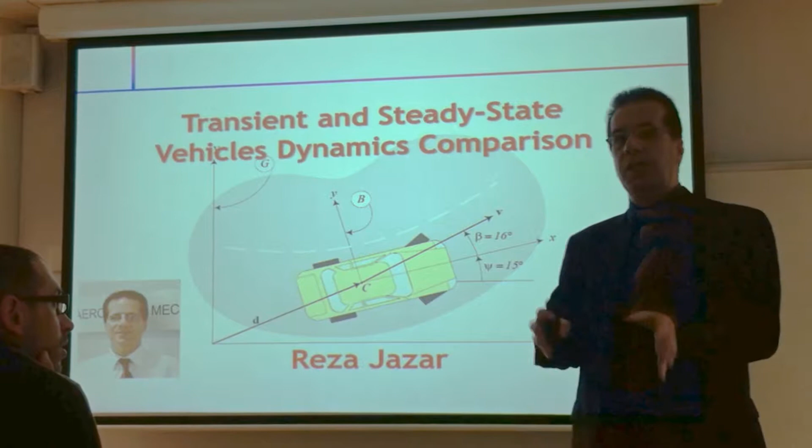A few years ago, in 2009-2010, I introduced a new algorithm called the auto driver algorithm for autonomous vehicles, especially for vehicles on the road. When you are on a road, you are following a line, so one-dimensional motion. When you are on a field, it's two-dimensional, more freedom. So the categories are different.

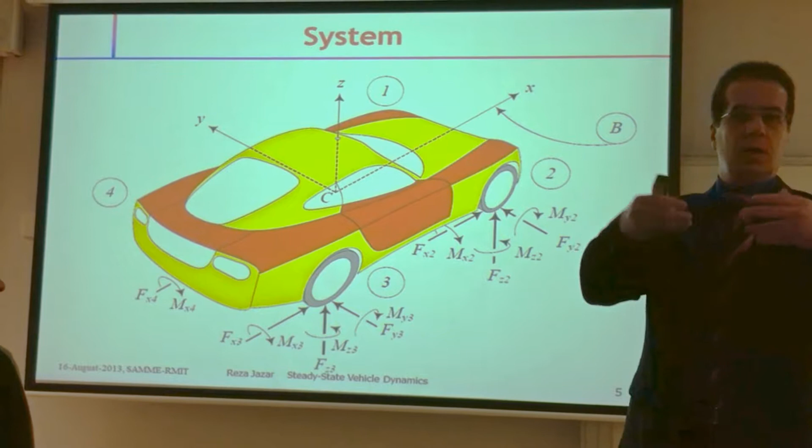I worked on that, and I'm going to develop something because of the difficulty to solve differential equations online fast enough. Today, I'm going to show you and investigate how close the response of the vehicle according to the steady state equation is to the transient equation. And if it is close enough, in the future we are going to use them, and I'm going to talk about that. For those people who are not in this area...

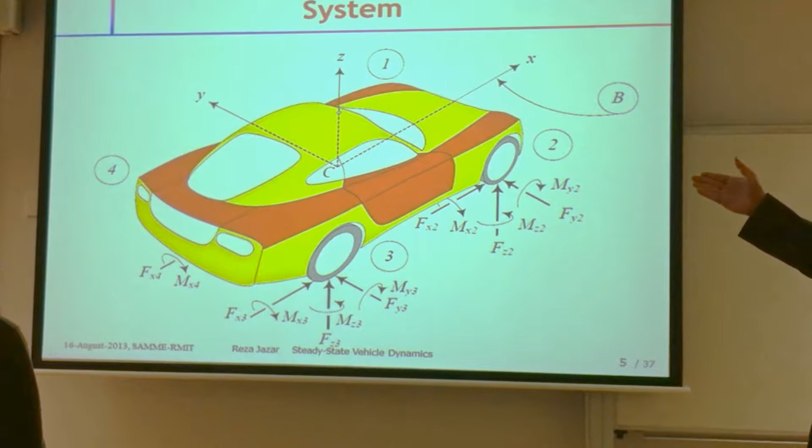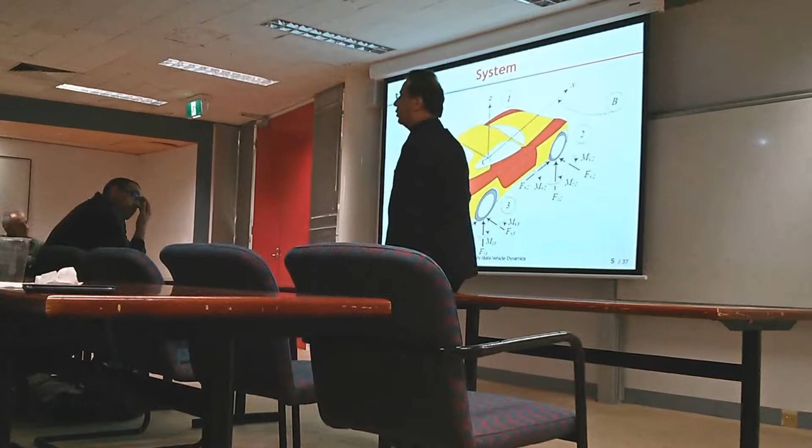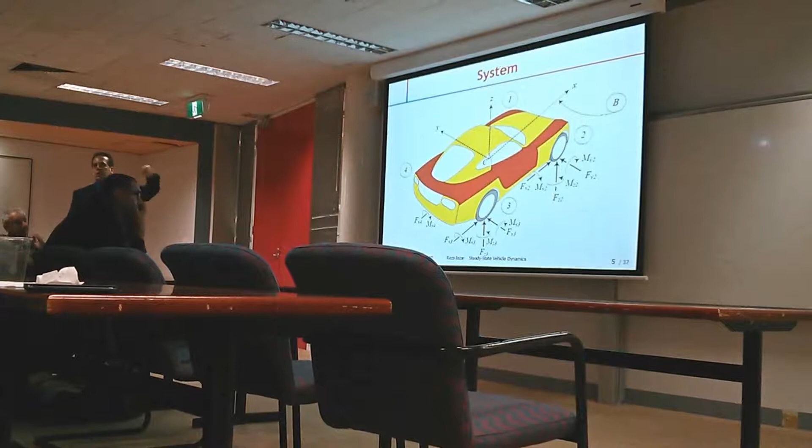We move all forces to the mass center of the car. The car is a rigid body, and those equations make the equations of motion. We make another assumption and assume that the car is planar.

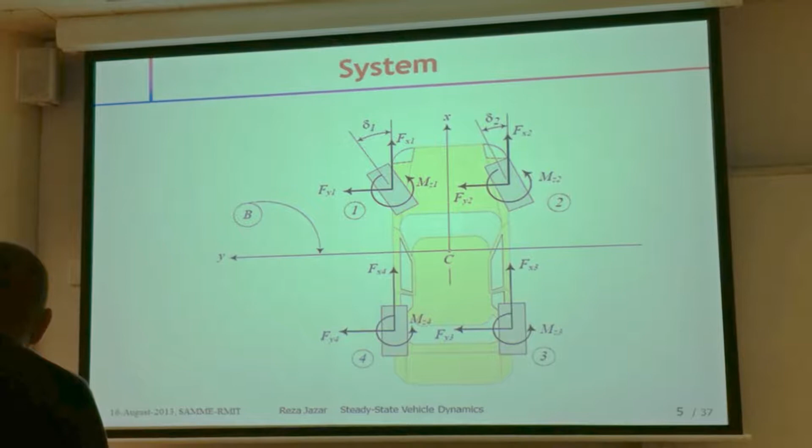Planar means no bounce, no Z movement, no rotation about X, which we call roll, no rotation about Y, which we call pitch. So we have 3 degrees of freedom out of 6. We have X direction motion, Y direction which is lateral motion, and then yaw rate or yaw motion, rotation about Z. So 3 degrees of freedom.

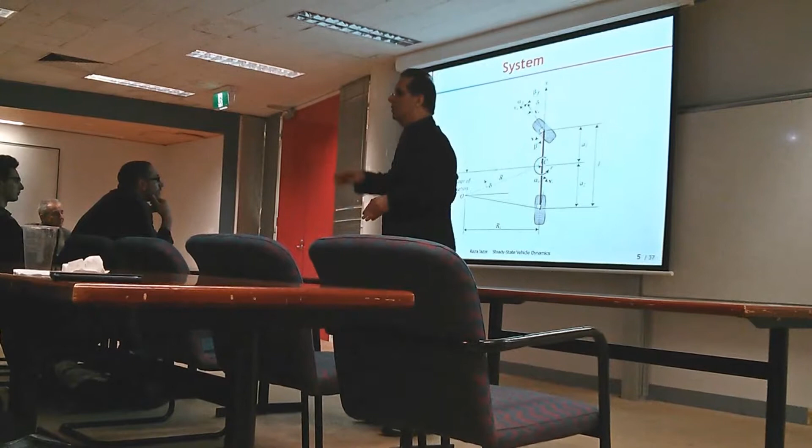Besides that, we make another simplification. We make it a bicycle model. When we have no roll, we don't need 4 wheels on the side. We can make it a bicycle, 99% exact. So whatever we do is the bicycle model.

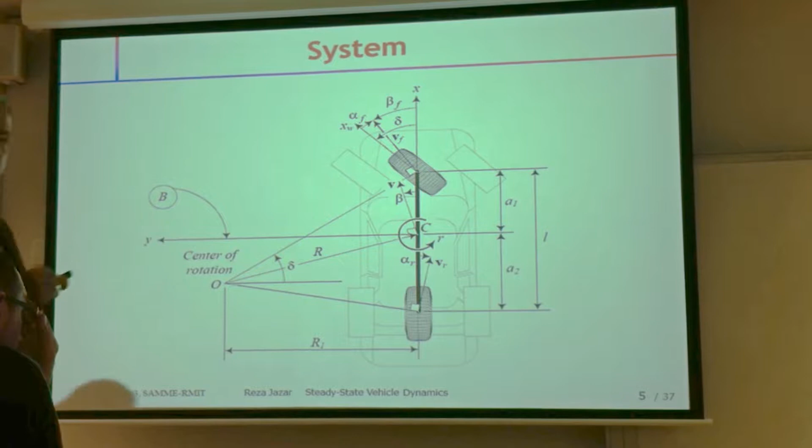I'll show you the equations, but before going further, I have to mention a few things. First, A1, A2 show the position of the mass center, critical information. A1 and A2, the position of mass center, makes your car understeer or oversteer. It is stable or unstable. Our cars, all of them, are understeer, stable.

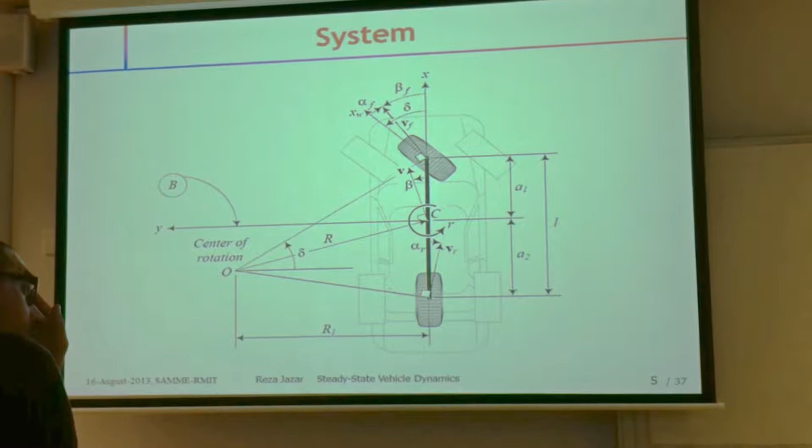So that's one thing. The other thing is delta. Delta is a steer angle. It is in your hand. We dictate what is the delta for this system. So delta is input from the driver. We dictate delta.

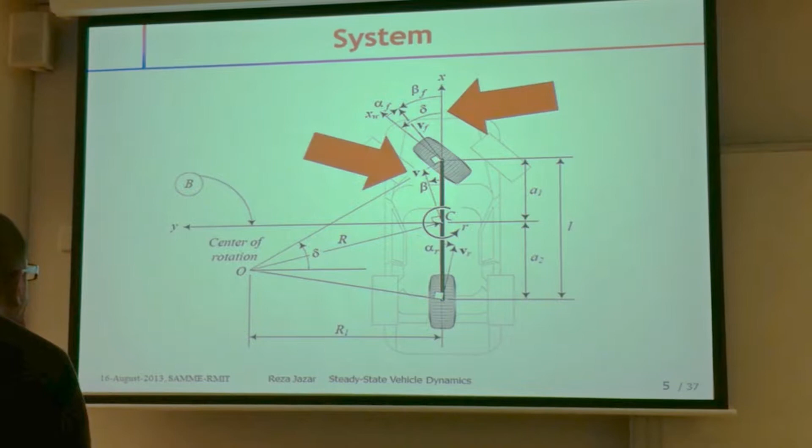V is the velocity of the car at the mass center. V has 2 components, Vx, which is in my control, so you control Vx, and Vy, which is lateral velocity associated to beta. Beta generates the angle of velocity. So V has Vx as input in my hand, and Vy as output of this system.

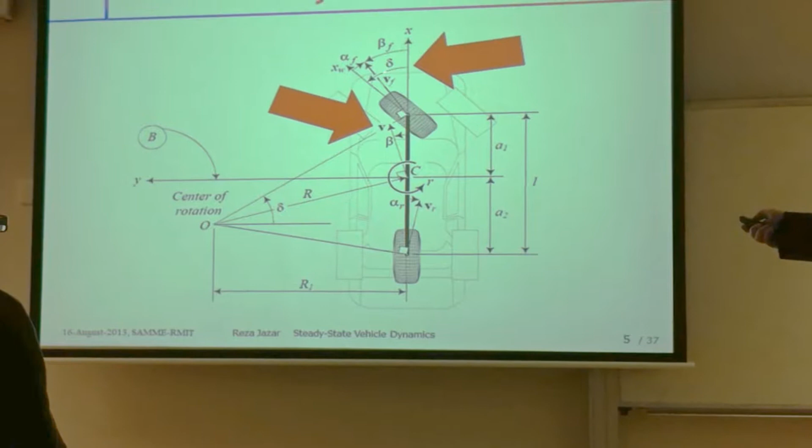This comes from a steering angle. So beta is another output. Also yaw rate, R is the yaw rate, so angular velocity is the dimension. That's all. This is the equation of motion.

Degree of freedom: usually we must have Fx, which is traction force, and calculate velocity, but practically we determine Vx and we calculate the required force. Forget about that equation. These 2 equations clearly give you the information we need: lateral velocity and yaw rate. These are 2 degrees of freedom, which are output of the system. The first equation is independent of the other one.

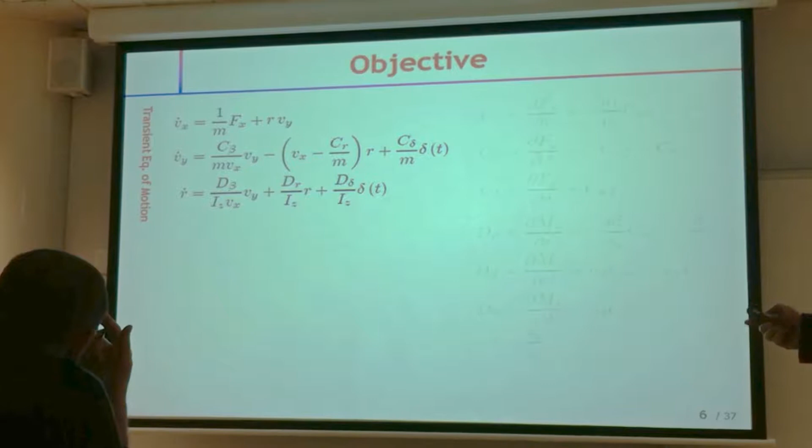These parameters or coefficients are here. Look at these coefficients, which are going here. Take a look: A1, A2, C alpha front, C alpha rear, and the rest of them are the same. It means when you have a car, you have the mass center position, so A1, A2 are fixed.

C alpha F is the side slip coefficient of the front tire, so it is a property of the tire and pavement interaction. This is for front, this is for rear, because it's a function of normal weight, so usually these 2 are different even though you are using the same type of tire. So when the car is given and the pavement is given, these coefficients are given.

There is one parameter Vx, which must be given by the driver. So you put them here, and the differential equations are set.

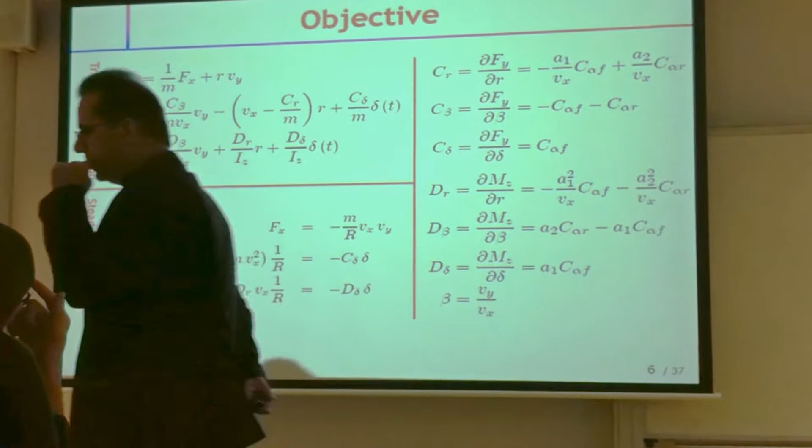Steady state condition means nothing is changing with time. So everything, every derivative, everything with a prime, with a dot, would be 0. Put these three to 0, simplify these equations, and these are the steady state equations.

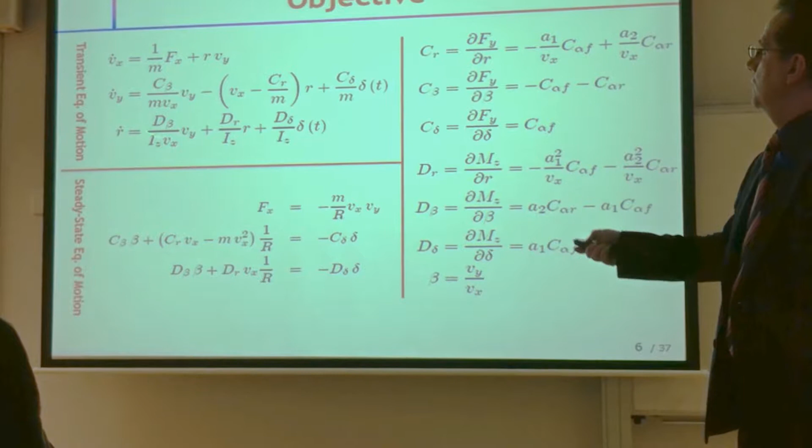So my job today, or objective, is to show if the solution from here can be trusted enough to be substituted for the solution here. What is the purpose of that? I will tell you later. So this is the objective: how close is the vehicle's steady state behavior to the transient behavior?

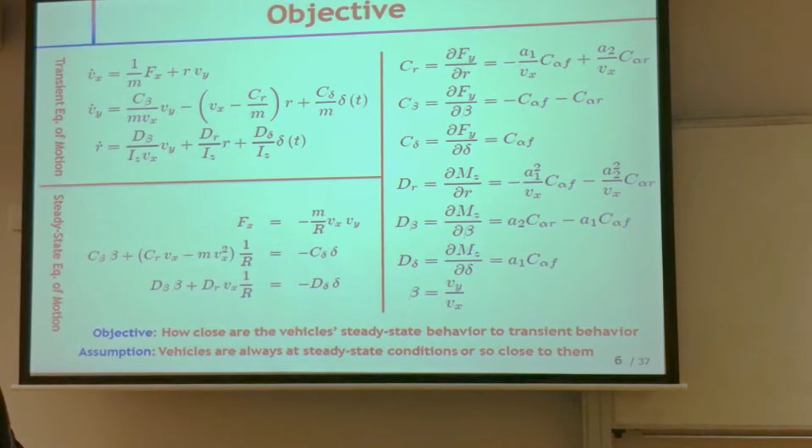And what is my assumption? The assumption is that vehicles are always at a steady state condition, or so close to a steady state condition. This is true. When we drive, our car is always close to a steady state condition. We don't have that many transitions.

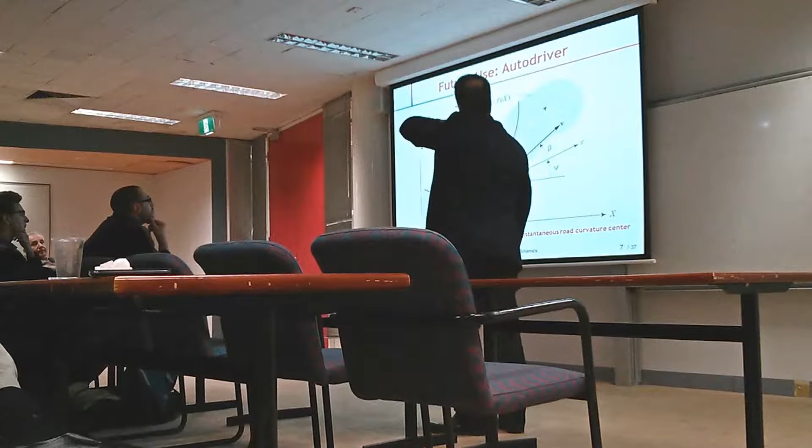The purpose of that is to use it in an auto-driver algorithm. This is another assumption: cars or vehicles are always turning about the center of curvature of a road. So when you have a road, it's a mathematical line. At any point, there's a curvature center. If you are going to follow the road, you must turn about that point at that time. So this is the assumption.

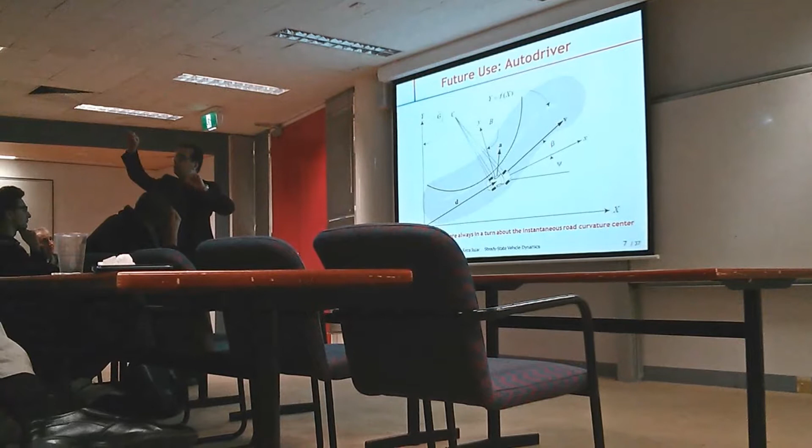How can we design a system to do this job for the driver? So the driver is not steering the car, steering would be done by a computer. It's so easy, the idea is so easy. It's a line, at any point the curvature center is given. We have to adjust - the computer has to adjust the steering angle to find the center of rotation of the car, and put it at the center of rotation of the road. It looks simple.

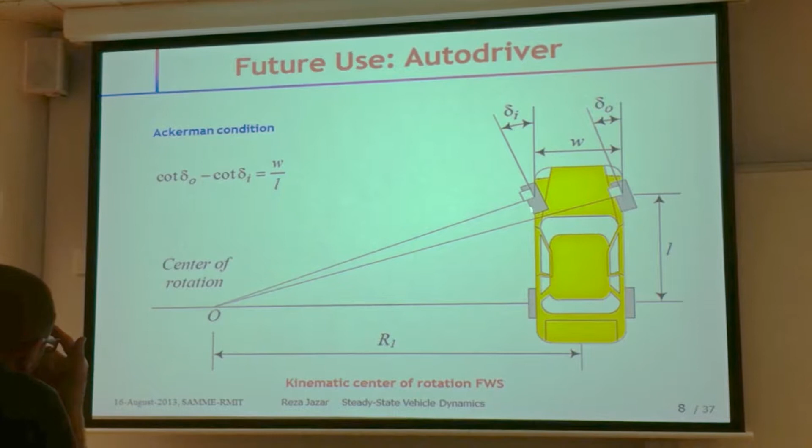What is the center of rotation of a car? Kinematically, if you have a front wheel steering car, then perpendicular to the front wheels must intersect on a line on the rear axle. This is the center of rotation of this car kinematically. As you can see, by changing the steer angle, we can move this point forward or backward - one degree of freedom we have. We can control the center of rotation of this car by changing the angle.

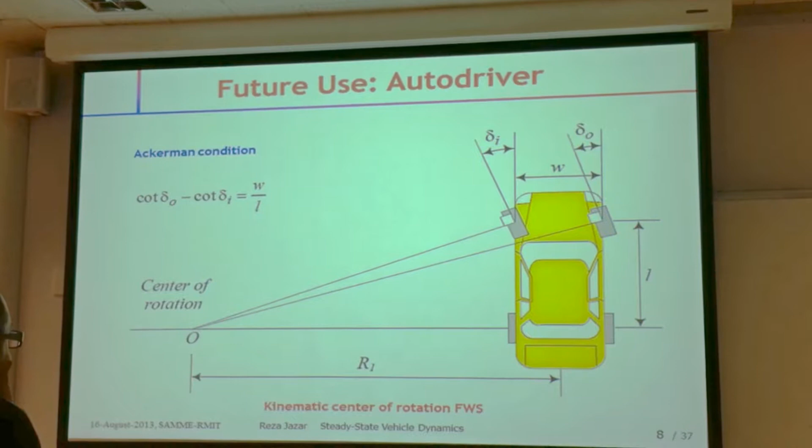The condition between these two, a very simple geometric condition, is called the Ackerman condition - an idea stolen by Ackerman. Different story, I put it in my book, you can read that. If you have four-wheel steering, that condition is a little bit more complicated, but still simple enough to implement.

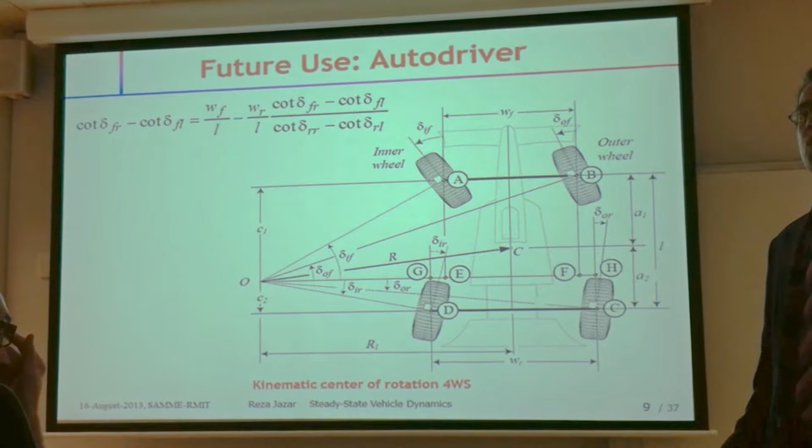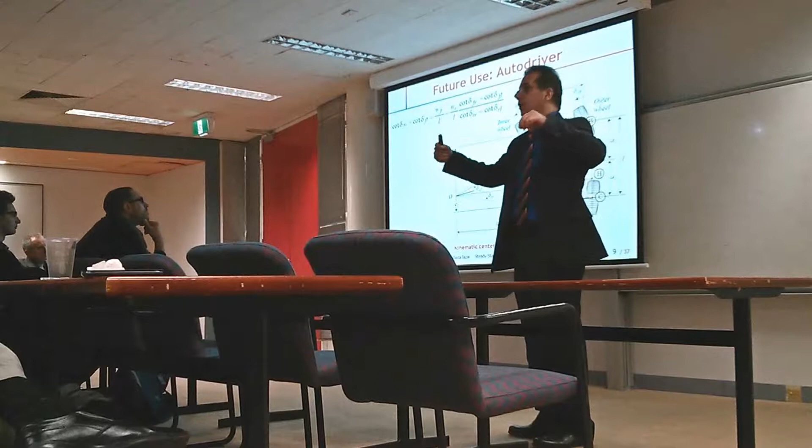Center of rotation - what is the advantage here? The advantage is that when you have steering in front and rear, you have two degrees of freedom. You can adjust these two to put the center of rotation wherever you want in the whole plane. You are not committed to just one line, you are not restricted to one line. So theoretically, four-wheel steering is much, much easier to handle for an auto-driver algorithm.

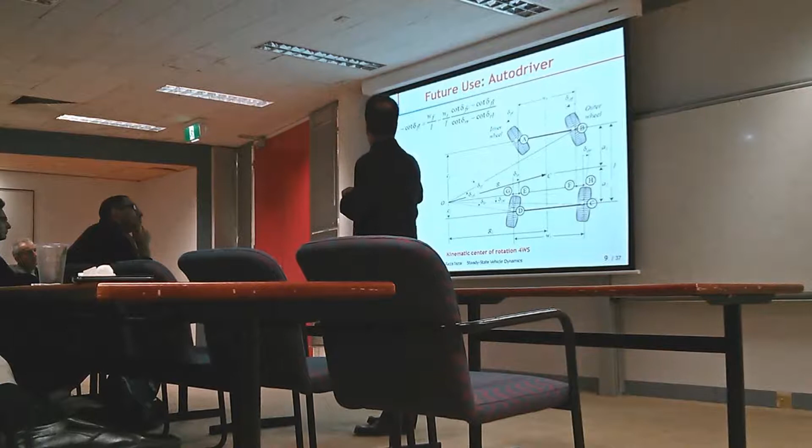This is what I did in 2010. Then Hormoz, who is working with me - most of this work today I'm presenting was done by Hormoz - was going to put this auto-driver algorithm for front wheel steering. Look what is the problem.

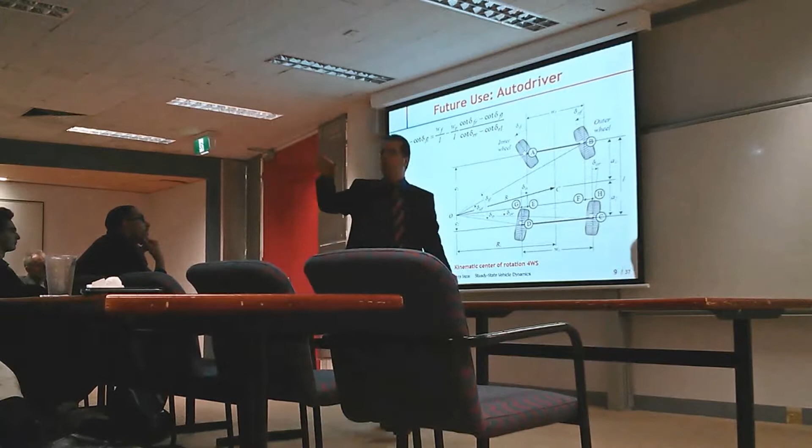If you have this car, and you have this point for the center of rotation of the road, and this point is not on your rear axle, it's impossible to turn about that. You have to move your car to bring the center of rotation of the car to that curvature center of rotation. But here, in four-wheel steering, no matter where you are, what is your angle, orientation, position, you can always adjust to turn about the curvature center of the road. So you see simplicity here and difficulty there.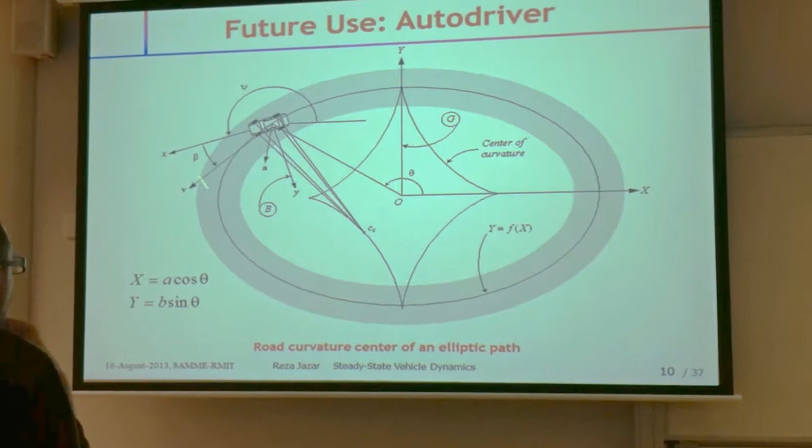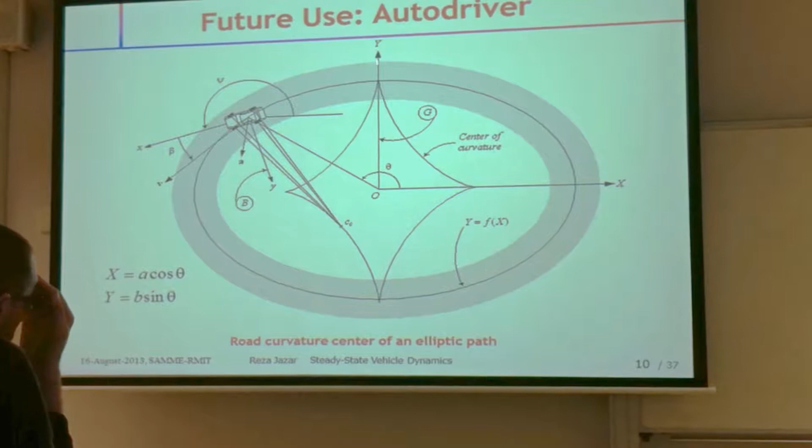But our cars are not four-wheel steering, so we must do something for front-wheel steering. Let me give you an example. If you're turning on this elliptic shape, what you do is adjust the steering wheels to turn about the curvature center at that point. This diamond here shows the curvature center of this road. So practically, you're looking at the road - it's an elliptic shape - but actually you are turning about this point. When you move, this point moves here. So as you move in this direction, that curvature center moves like that. It's very simple.

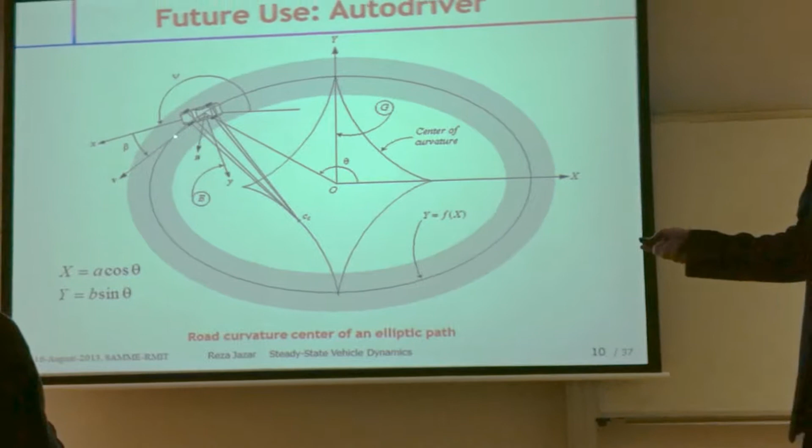If I have this road, I calculate this, and wherever I am, I adjust the front and rear steering angles so that the kinematic center sits at the right point. So your car can follow the path.

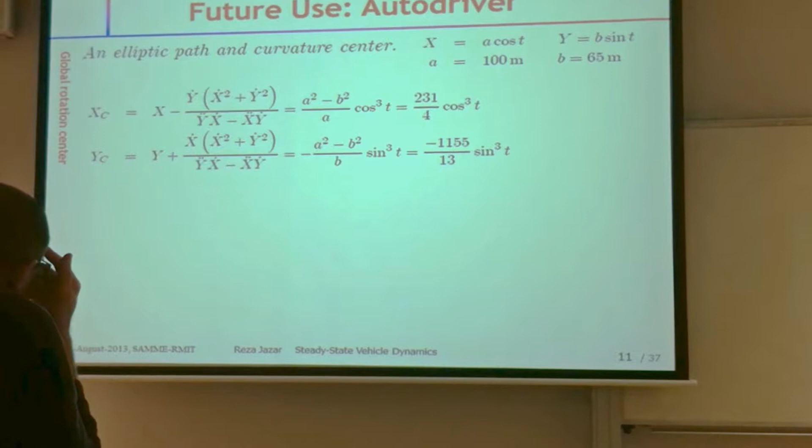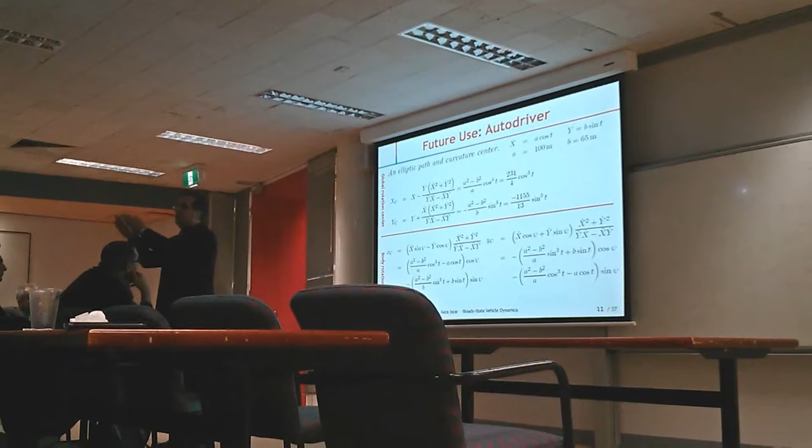An example: this is that ellipse, and assume we are moving with a constant angular velocity there. Some calculus gives you the position of the curvature center. Some transformation gives me the position center in body coordinates. I forgot to mention that whenever you have a car, there is a body coordinate attached to the car - we calculate everything in that body coordinate. It moves with us, but sometimes we have to go to global coordinates, so there is a transformation. It's a little bit confusing, but in two dimensions it's not that hard.

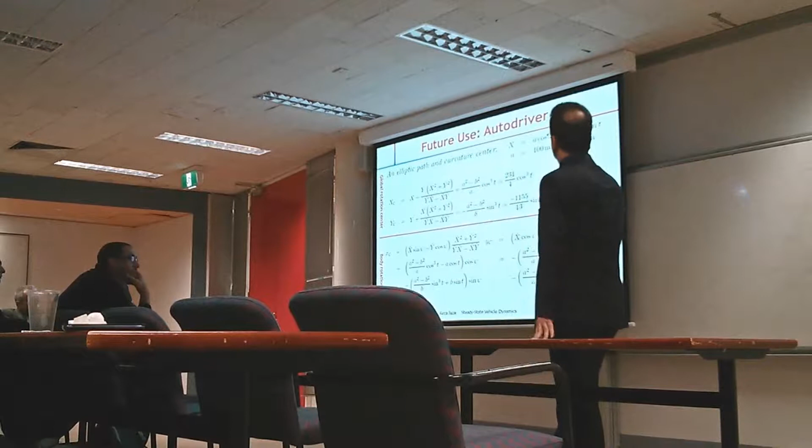So these are curvature centers globally, coming from the road. These are curvature centers locally, going to the body coordinate. Now I can adjust the steering angles, and these are the steering angles for four-wheel steering. This is what I've done before, so you can follow this path.

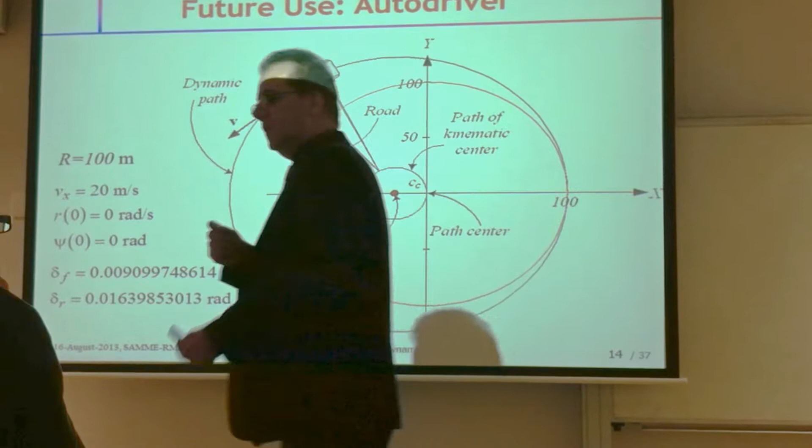It's not happening. Why is it not happening? Because there is something in the car, and that's the side slip of the car. No car goes perfectly as we decided or planned.

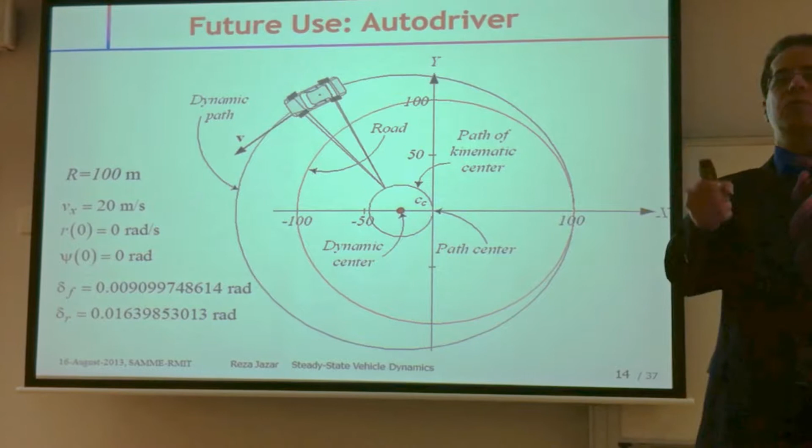What happens is that we have 3 points. One is the curvature center of the road. Let's assume your car starts here and is supposed to follow this circular path. Very simple, the center of curvature is one point. It's not moving, so we assume we must have a constant front and rear steering angle forever, and we are supposed to follow this.

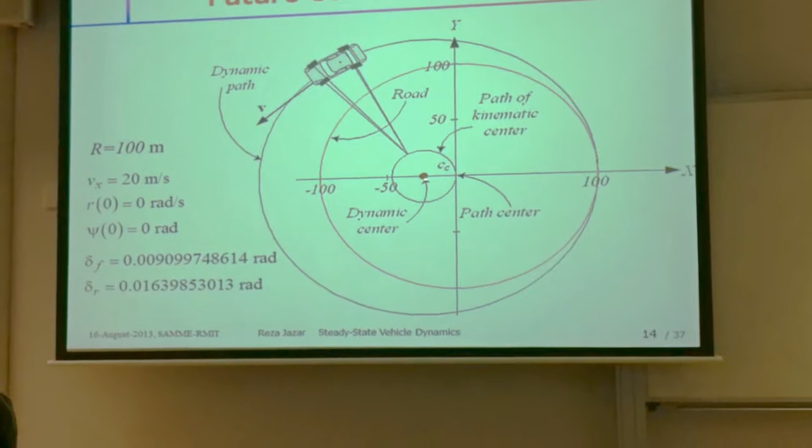When we set these angles at very, very low velocity, we are going to follow this. But when you push the pedal, if your car is understeer, you move away from the road, and you are actually turning about another point, which is the dynamic center. But practically, we adjusted kinematically to be here.

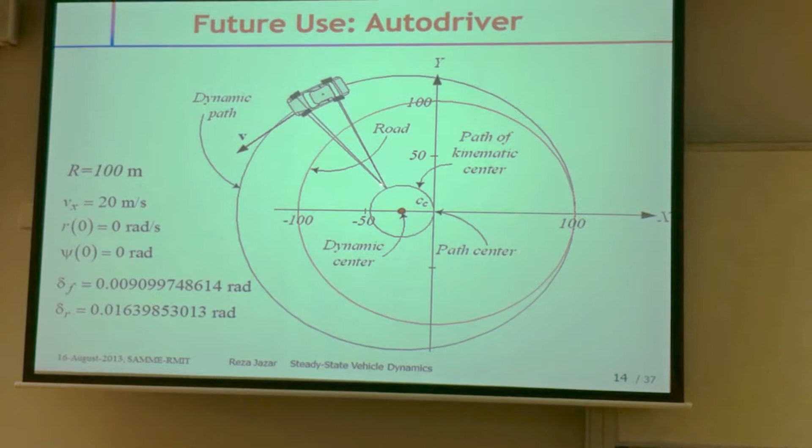As you can see, this is the point you are supposed to turn about. This is the point you are actually turning about. And this is the point that kinematically you are supposed to turn. What happens is that the kinematic center of rotation will turn about the actual center of rotation. Our goal is not to put this on that. Our goal is to put this on that. So to do that, we must do dynamic analysis.

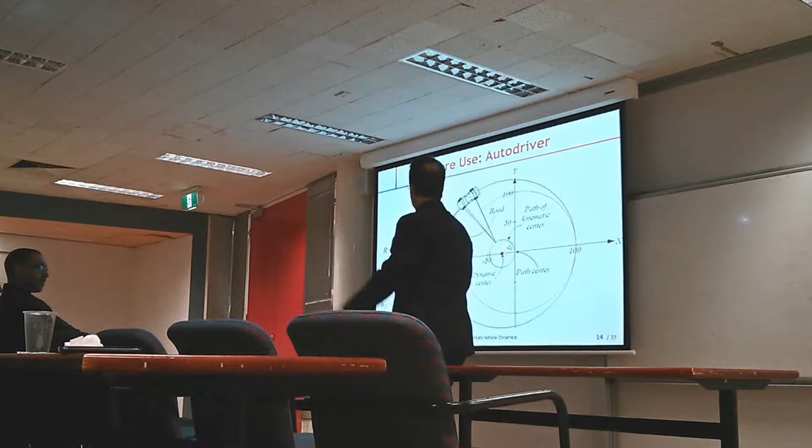Here is the problem: dynamic equations are so hard to solve for every case. We need some approximation. My question is this: are steady-state equations good enough to do the calculation, to put this here?

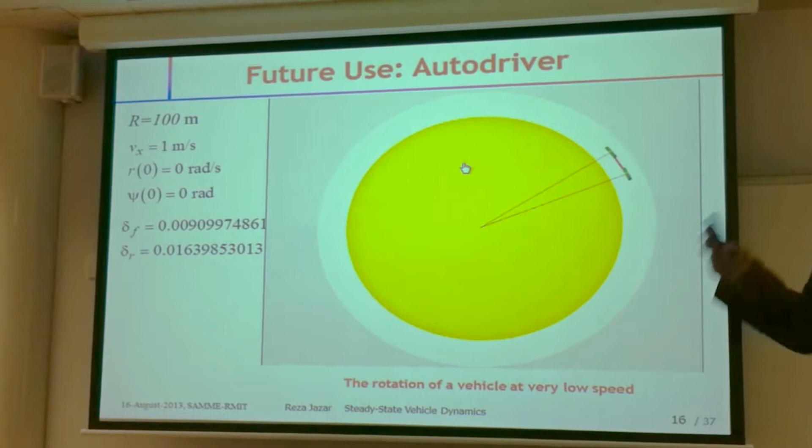Why? Because my speed is very low, close to zero, so kinematic calculation works very well. But when the speed is higher, this is what happens. Speed in this case is 20 meters per second. This is what happens practically.

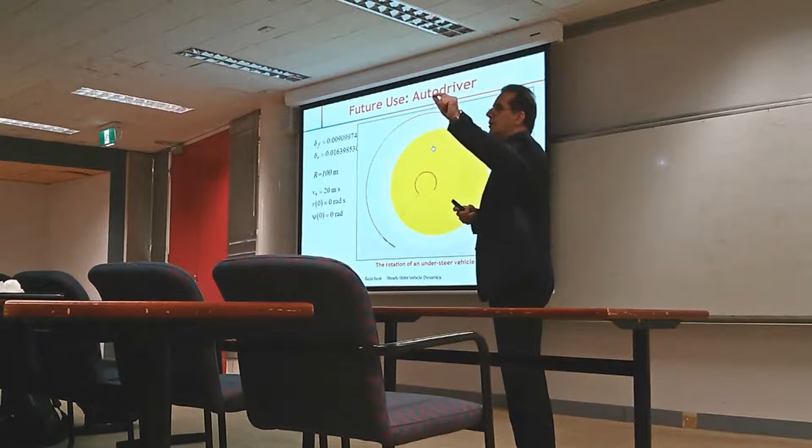Now our job is to bring the dynamic center to the road center. How can we do that? What is in our hands? The only thing we have is a steering angle. We have to steer more to bring the dynamic center to the road center. How can we calculate that? We have to go inverse dynamics, back and forth, trial and error, and find out how much steer angle we need to implement to bring these two together.

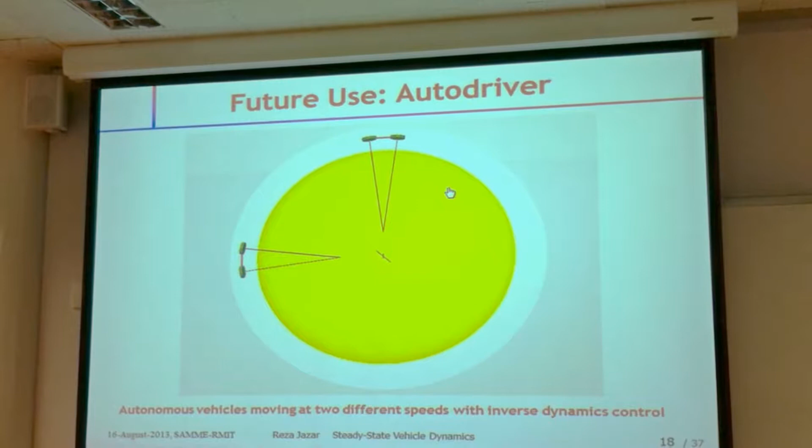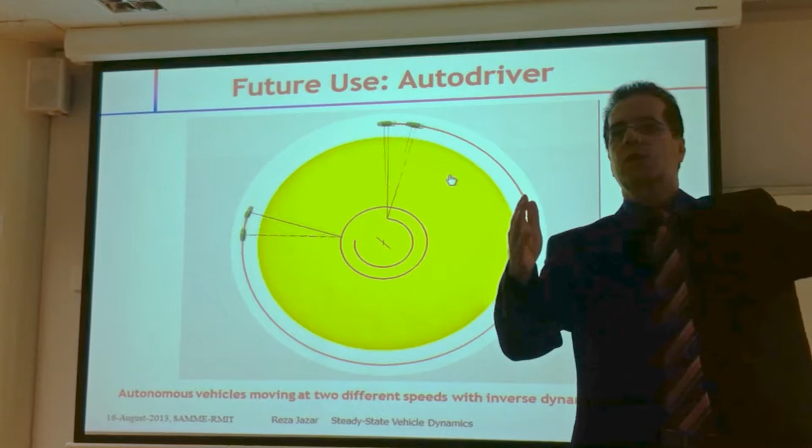We did that, and this is the result. Same car, different speed, different steering angle, and both of them are following the path according to our wish. How you can adjust the steering angles in front and rear for both of these cars at different speeds is a calculation based on inverse dynamics. So you got the idea that the steer angle is a function of velocity. You must have a calculation, velocity, and then proper steer angle.

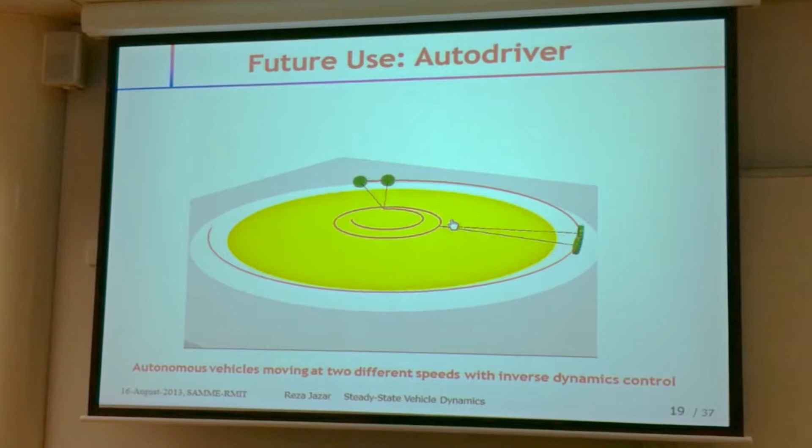Now, if you have a front wheel steering car, I told you that kinematically, this is my car — kinematically, the steering center of the car is on the rear axle here. Not this, yes, lower. But practically, when you push the pedal, when you go faster, the center of rotation of the car is moving on this line.

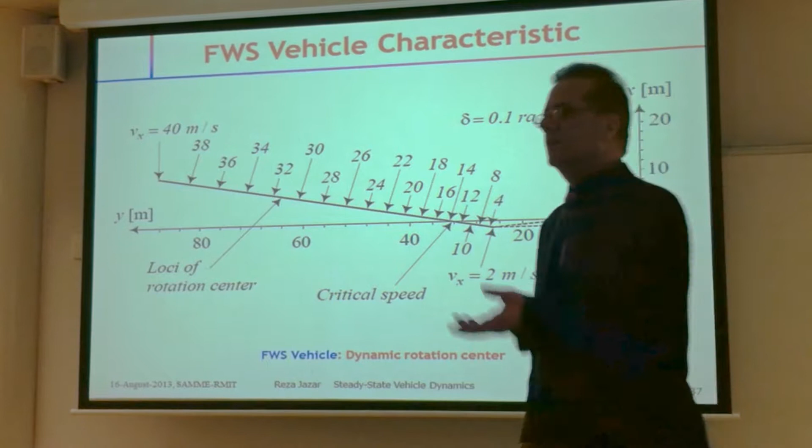It's not a line, it's a curve, but close to a line. When you are driving at 40 meters per second, 150, 60-something kilometers per hour, you are actually turning — when you turn your steering wheel 5 degrees, you are turning about a point 90 meters away, around 15 meters in front of you. Clear?

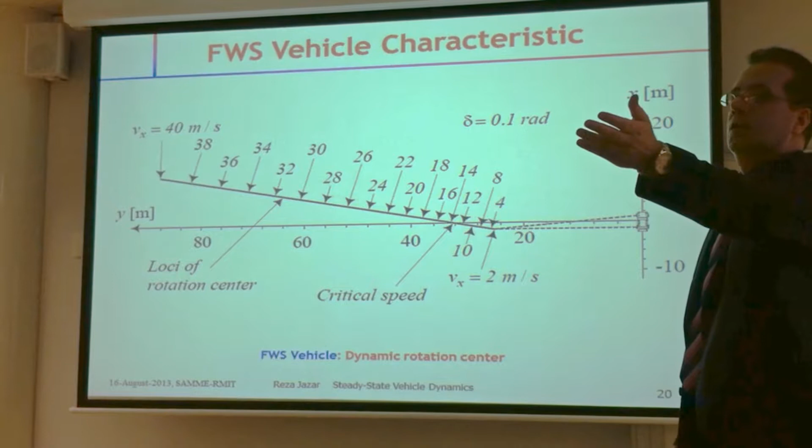If you want to turn about this point, which is the curvature center of the road, you have to adjust your speed to this speed, right? Or increase the steering angle. But point 1 is the maximum allowable, which keeps us linear. After 5 degrees, at that speed, you are going to slide away. So there is a safety issue.

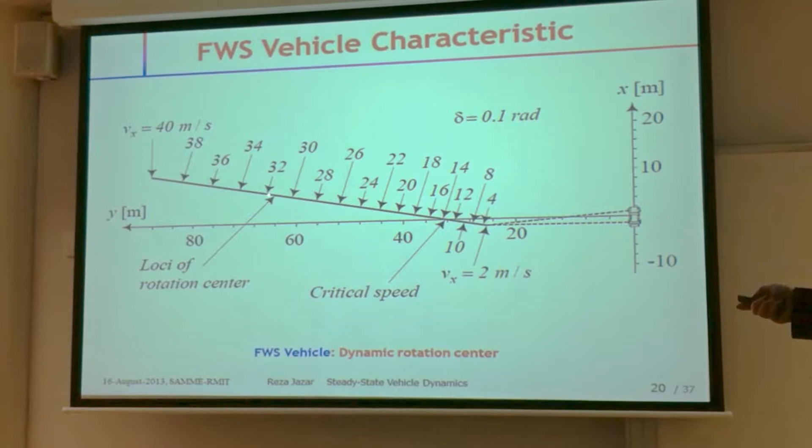You got the idea that there must be a proper speed for any point at a specific steer angle to put the dynamic center of rotation of your car on the curvature center of the road. That was the definition of the problem. So you got the problem. Get back to the objective that we have. I'm going to show the result of the steady state and compare it to this, to be used in an auto-driver algorithm for front wheel steering.

But it gives you a very heavy understeer car, which is stable. So it's following my rule much better. According to the steady state condition, radius of rotation would be this, beta, which is lateral velocity, is here. Doing some calculation, you can find the curvature center or rotation center of the car.

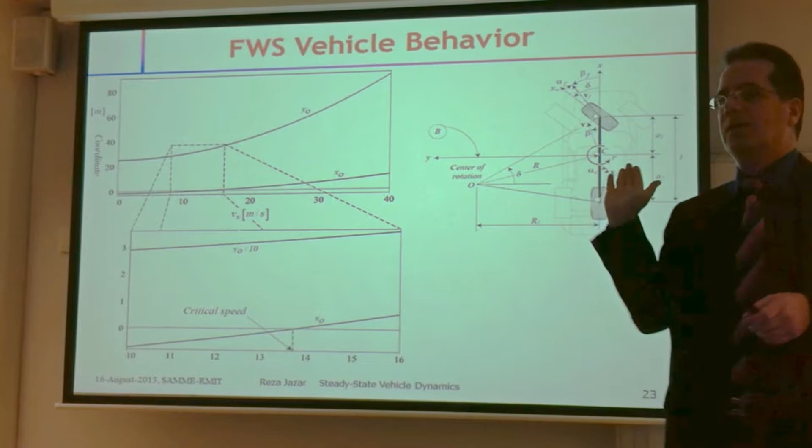I'm not going to talk about that today, but it is just crossing the zero for here, and we call that critical speed. At that speed, your car is tangent to the road. Below that, you are inward. Higher than that, you're outward. Exactly at that critical speed, you're tangent. That's the best speed for that road. It's not our intention today. So you got the idea that the rotation center of your car, how it's moving away from you.

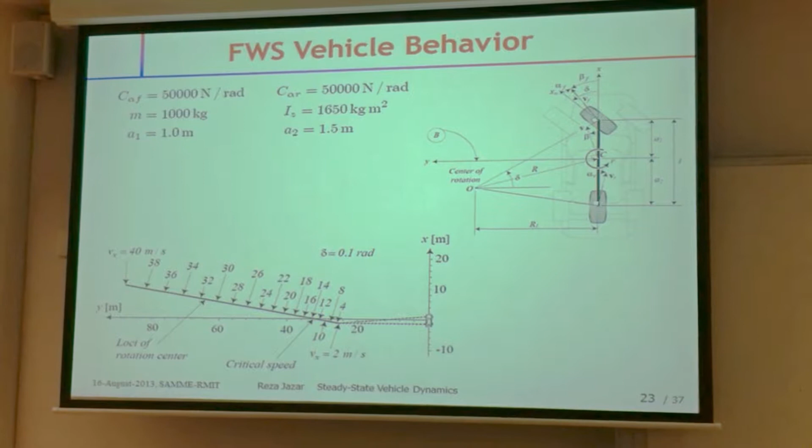Let's try 2 maneuvers. The first one is a constant steering or a step input in the steering angle. Step input means from zero you jump to a steady state or constant value. There's a transition that you go through, finally following a circular path because the steering angle is constant. Finally, you are going to have a circle, right?

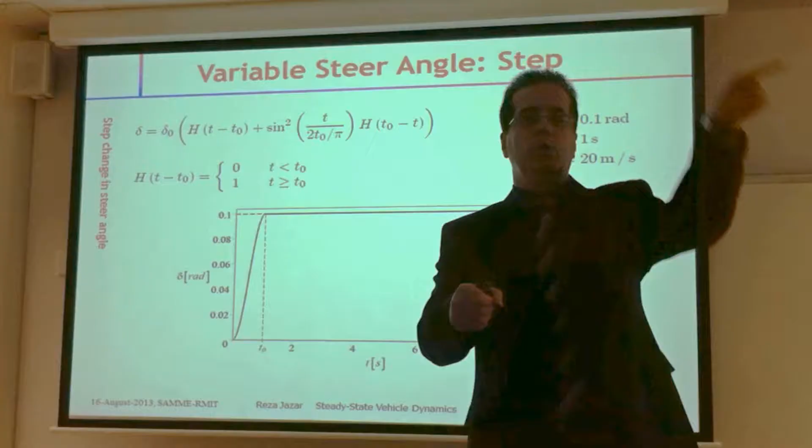But practically, no human can do a jump in the steering angle. This is what we do: in 1 second, we go from 0 to 0.1 radian, and then we keep it constant. This is the function, mathematical definition of this steering input. H is the Heaviside function.

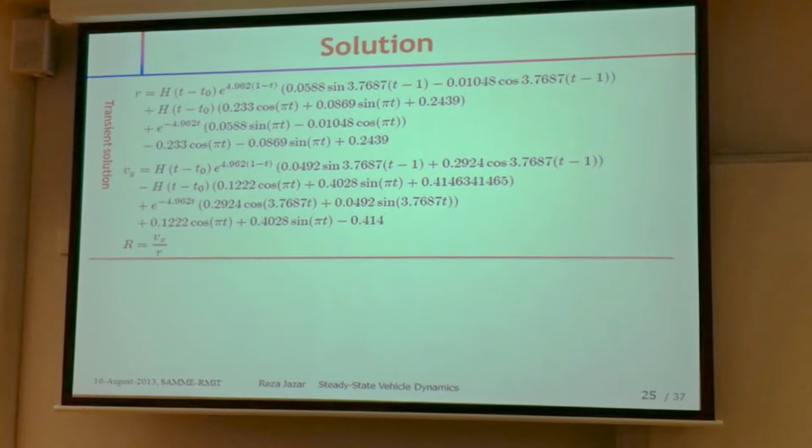Funny name. We were lucky, it's just a show off. We were lucky for that special case, we could solve it analytically. We don't need that, but we could solve it analytically. These are the transient results. So how close are these two, so simple now?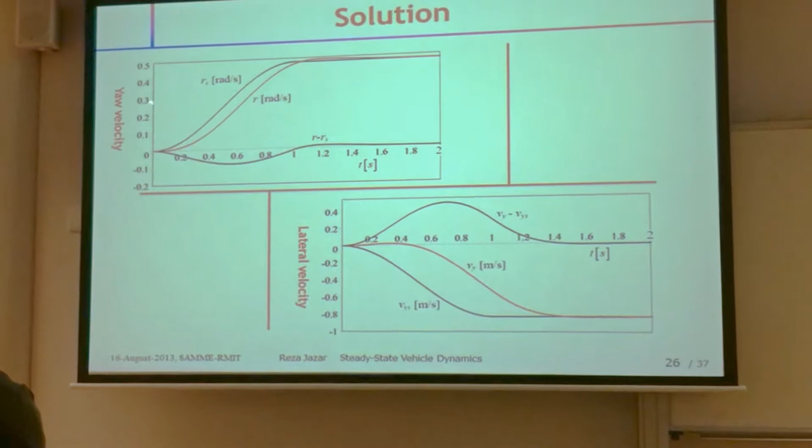We can draw the curve and see what happens. This is yaw velocity. R sub s is the steady state yaw rate, and the red one is transition. This is exact according to our model. This is the steady state, and this is the error. Of course, the error goes to 0. Both of them eventually will turn on the same circle in local coordinates.

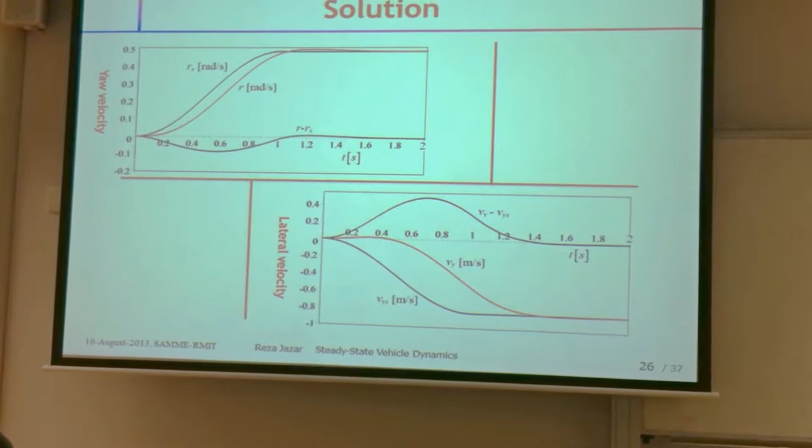And what is here? This is lateral velocity. The difference goes to 0, and as you can see, there is a difference in transition time, almost 1 second. You remember, in 1 second, you are going to change the steering wheel. So after 1 second, or half a second, or another second, it takes for the solutions of two different models to approach each other and become equal.

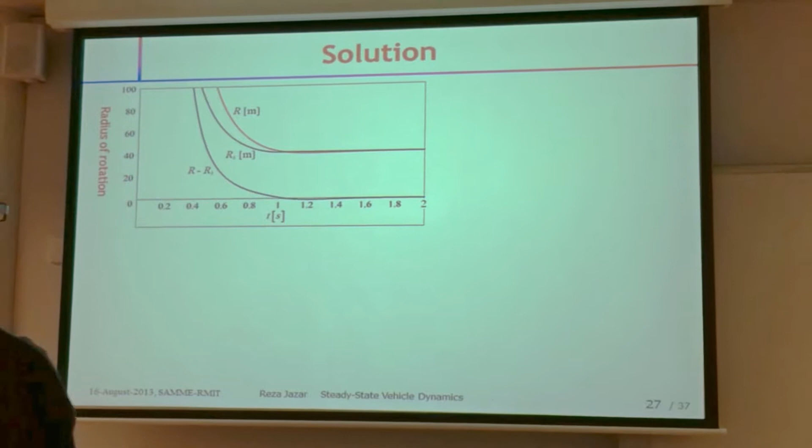Which one is faster? Which one is faster? As I said, this is transient, this is steady state. Wherever in these figures you see, the transient response has a lag. It's lazy. It's behind the steady state. Steady state is ahead of it.

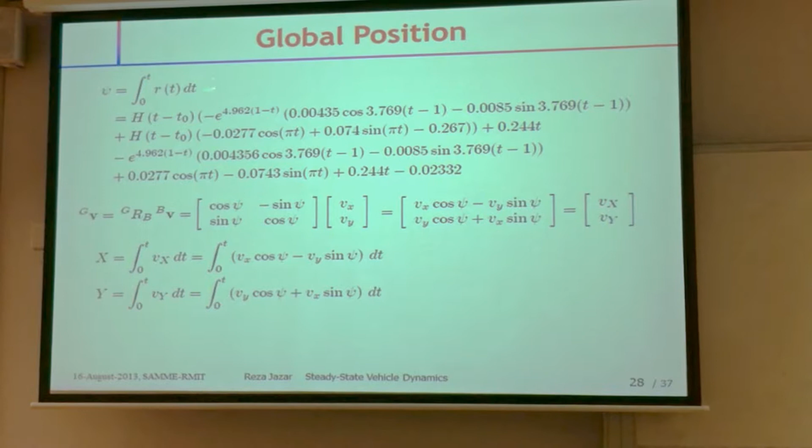Psi is another integration of yaw rates, and then some transformation, some integration. You find the position of the car in the global coordinate, and this is in global coordinate the difference between x and y. X and x steady, y and y steady, and we put them together to see what is the difference on the road. This is the geometric difference.

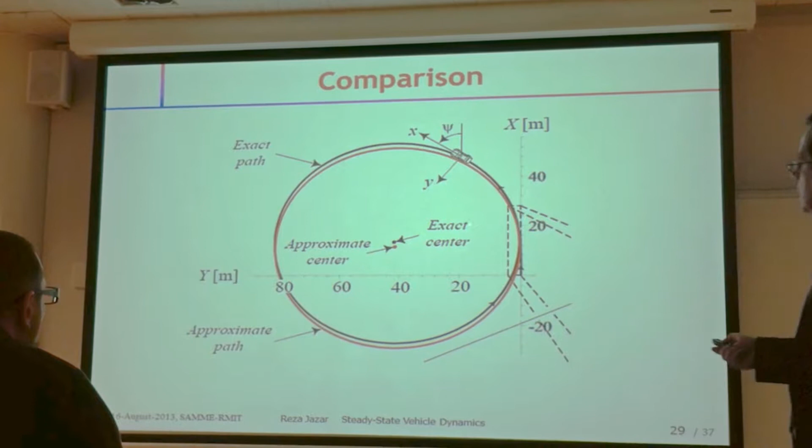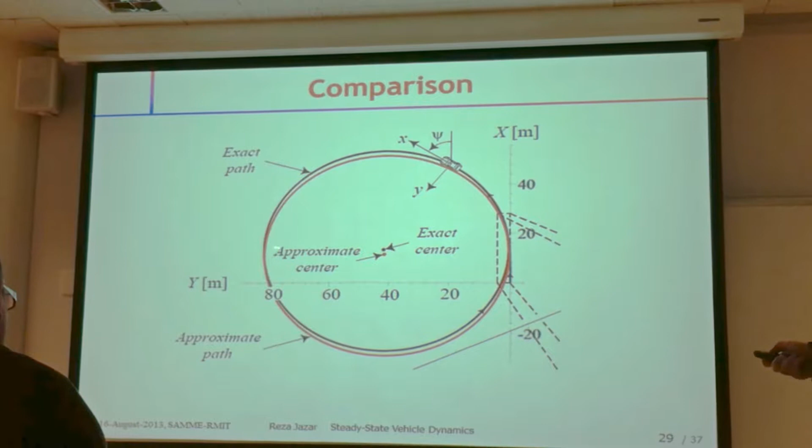It's supposed to be a circle again. The geometric difference, it's turning about around 80 from 0. I mean, 48 meters is the radius of that, and you see a little bit of exaggeration here, but you got the idea. This part, transition, is shown here.

So both cars are starting here, and one is following the red one, which is exact. The other one follows the black one, which is steady state. Not in scale, here I show the difference better.

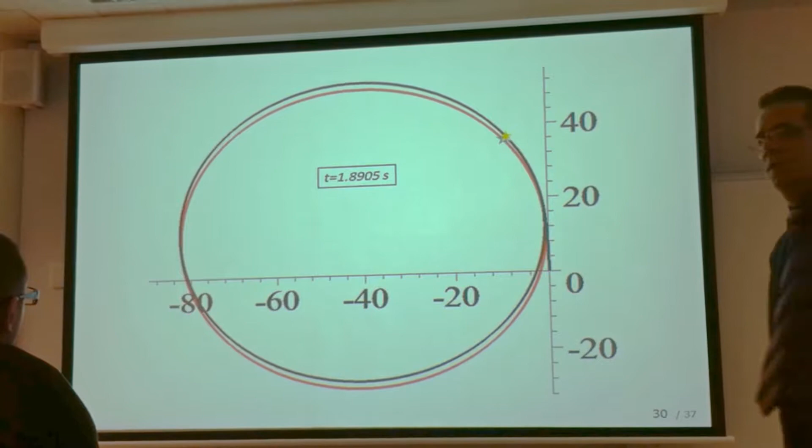The difference is not just geometric. Time-wise, there is a difference. One of them has a lag, shows that in time also it's behind the other one. So steady state is in front of transient. And you see the time here.

The radius of both circles are the same. The centers are misplaced.

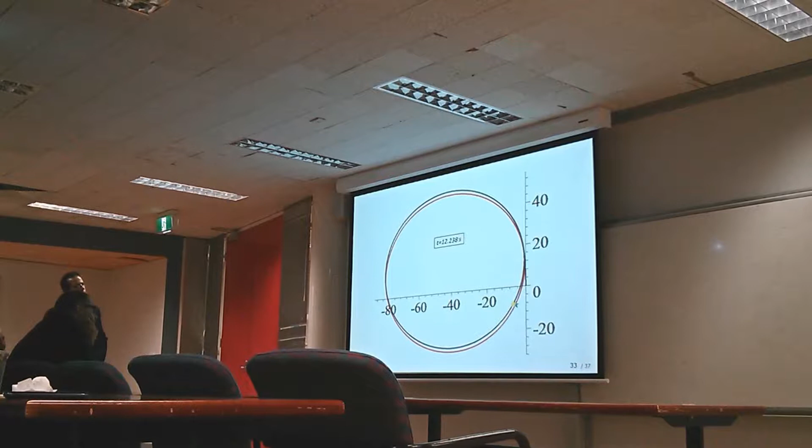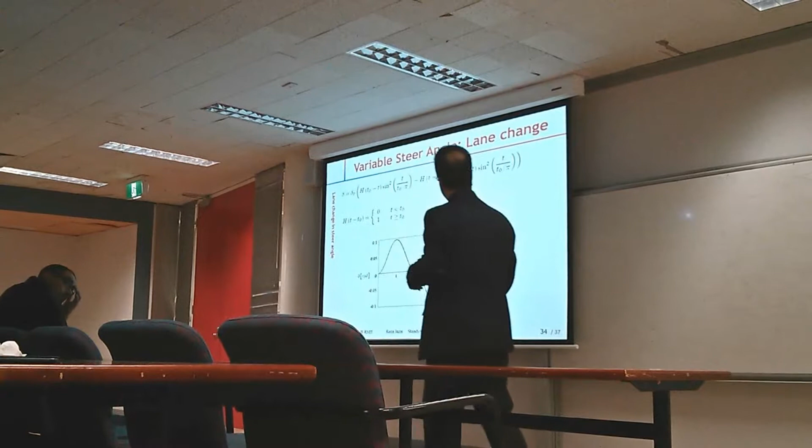Very good. After one round, they are catching each other. So that was the first experiment, doing some mathematical analysis, comparing these two and seeing how close they are. We found out that in time there is a lag, in geometry there is a displacement. Everything is related to the velocity and steer angle, which are inputs. If we make it slower, or decrease the speed, they are going to be closer to each other.

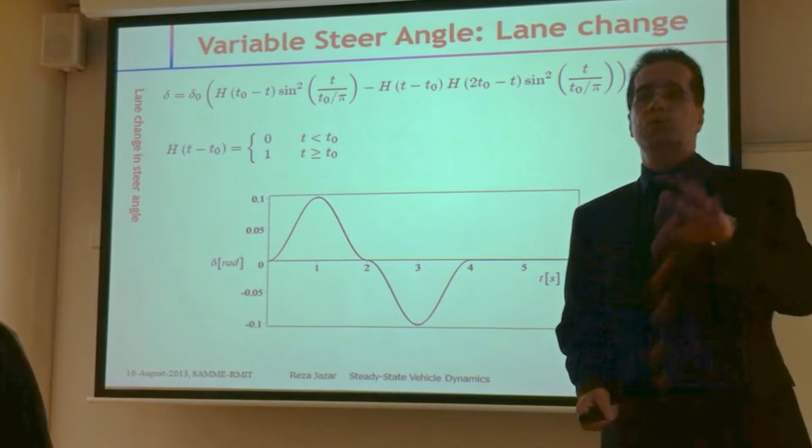For another example, I give you this input. It looks complicated, but it is a lane change maneuver. This is how we change the steering angle to do a lane change, and this is what you see for actual steer angle. This is the difference after doing all of those calculations. Still, there is a lag here.

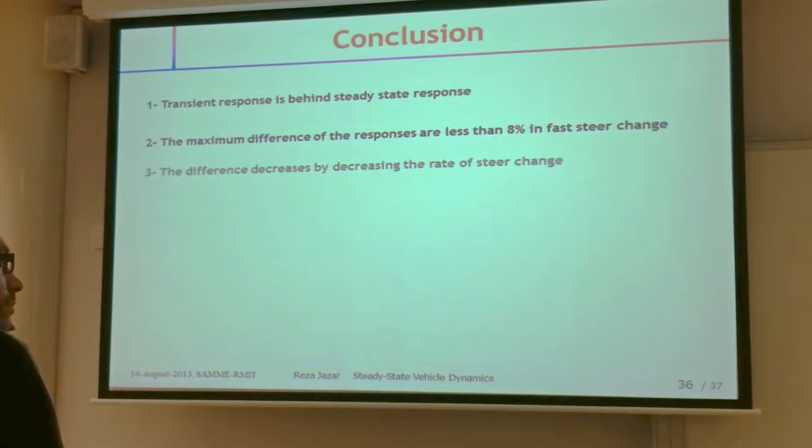I'm done, on time. Conclusion: transient response is behind the steady state response, and it's a function of velocity and steer angle. We have to figure out what is the condition for that, to make sure that transient response is acceptable enough. The maximum difference of the responses in all cases was less than 8%, for those numbers that we used.

If, for example, we are looking for a specific percentage, say 2%, we have to figure out what is the boundary of steer angle and also velocity. The difference decreases by decreasing the rate of steer change. Of course, you can guess it.

What is the next step? First of all, we have to conclude variable steer dynamics. These two examples were for constant forward velocity. I told you that forward velocity is another input, so we have to do some analysis for acceleration maneuver at a constant steer angle. Then combine both steer angle variable and velocity variable, and analyze if there is a reasonable comparison between steady state and transient.

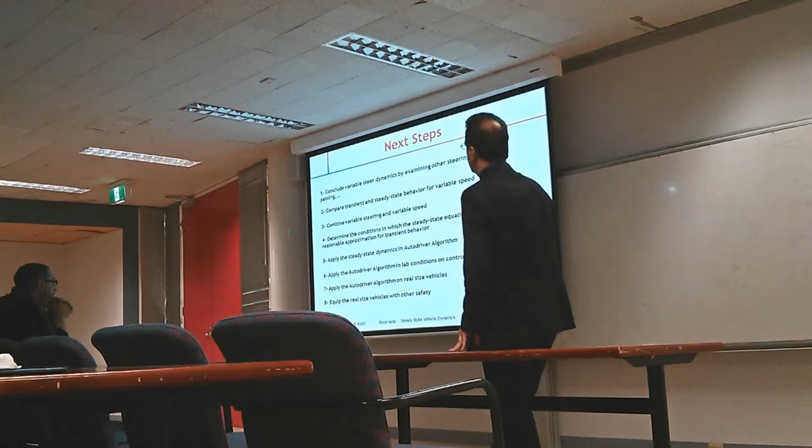Compare transient and steady state behavior for variable speed, as I said. Hormuz is doing that at the moment. Combine variable steering and variable speeds, of course, and determine the conditions in which the steady state equation provides a reasonable approximation for transient behavior. This is our goal, to find the condition within which we can accept this closeness.

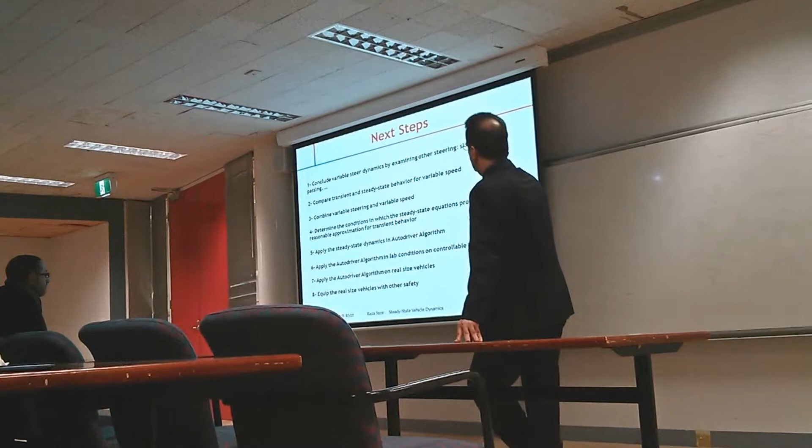Then apply the steady state dynamics in the Autodriver Algorithm. After this point, everything goes to the Autodriver Algorithm. Apply this algorithm in a lab condition, controllable RC vehicle. Apply the Autodriver Algorithm in a real size vehicle, and then equip the real size vehicle with other safety issues. I'm done, thank you.